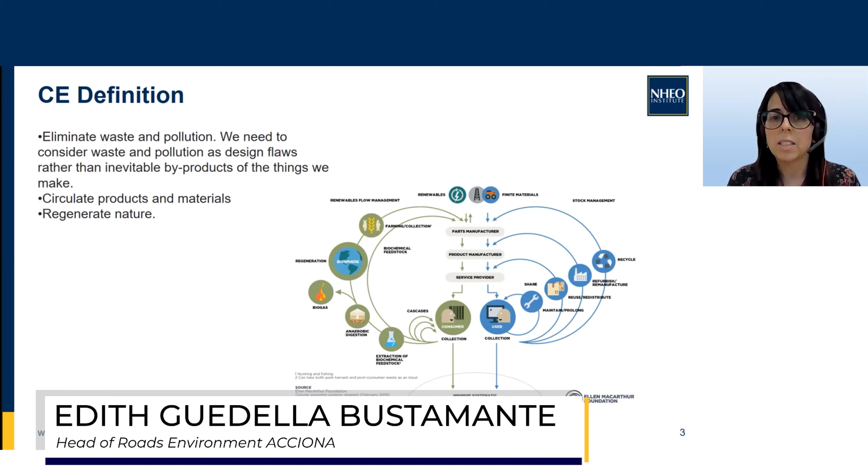All these principles are clearly stated in the butterfly diagram from the Ellen MacArthur Foundation, where this diagram is a feedback system divided into 2 systems, the mechanical cycle and the biological cycle.

Regarding the mechanical cycle, we start by the recycle of materials, which is the cycle where the product has the least value. Then we have the restore cycle of a product, the reuse of a product, and the maintenance of a product. Each of the cycles contributes to the system.

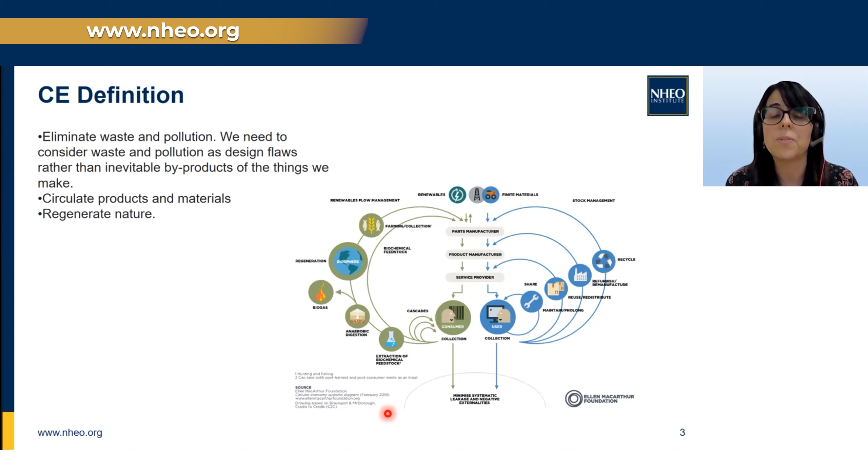Then we have the regeneration system associated with the biological cycle. The biological cycle is composed of biological materials that could return into the natural system, and that is why it's a regenerative cycle. Valorizing and appreciating flows of energy, materials, and information is the meaning of the feedback system that represents this diagram. Instead of losing these resources, they return positively into the system and rebuild and restore natural capital.

Once we have the vision of circular economy, we are going to relate circular economy with sustainability, with the SDGs contribution. The circular economy has a direct impact on 80% of the SDGs, with an extraordinary transformation capacity, work creation, and economic development. But we should be aware that circular economy needs to address the social aspects of the SDGs.

This is the reason why we need to focus on the gaps where circular economy is not very well known for addressing the current SDGs, for example, the ones of 1, 2, 5, or 10. And there is a requirement to enable circular economy transition, pushing the relationship with the SDGs 4, 16, and 17.

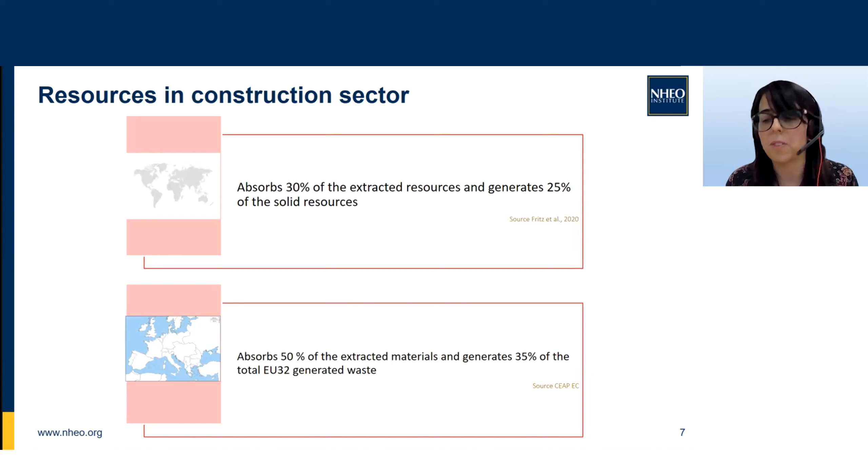Let me introduce the current building development cycle and how we produce from the design phase to manufacture, construction, use, demolition, and landfill. This is our current system.

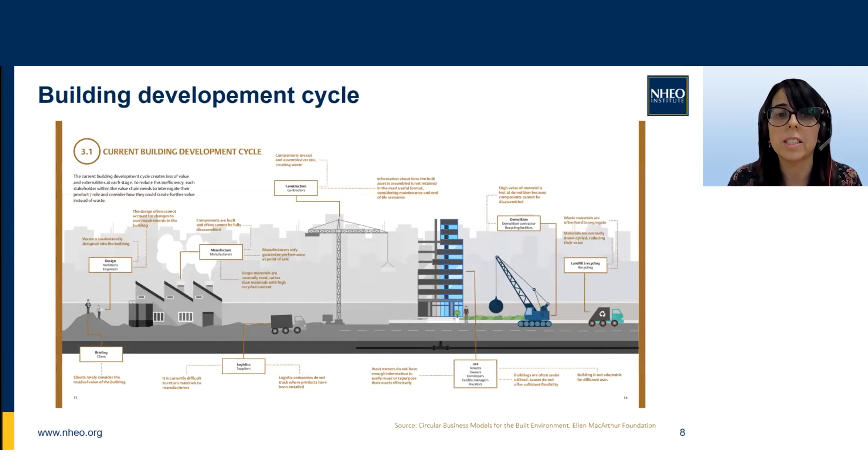And what we would like to do is transform this system. How can we do that?

We can apply different circular business models in the current value chain through approaches of circular design, circular use, or circular recovery in each of the stages previously mentioned: design, manufacture, construction, operation, and end of life.

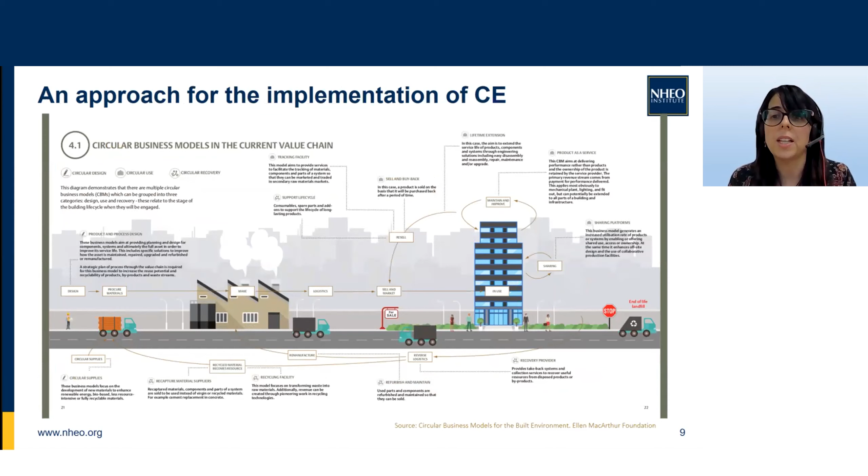And in the end of life, we need to create added value on that.

Now I would like to give you some examples of circular economy applications in the different life stages of construction, associated with this circular cycle, circular products, or regenerative design.

In this case, we start with an example in design and manufacture, applying eco-design principles.

I would like to show you the example built by ACCIONA of the first lighthouse made entirely of composite materials in the world, installed in the port of Valencia.

This lighthouse was designed following LCA practices for the selection of materials. It was designed taking into account durability.

It was designed in order to support the environmental conditions, as it is on the coast, and integrating renewable energy for the production of light.

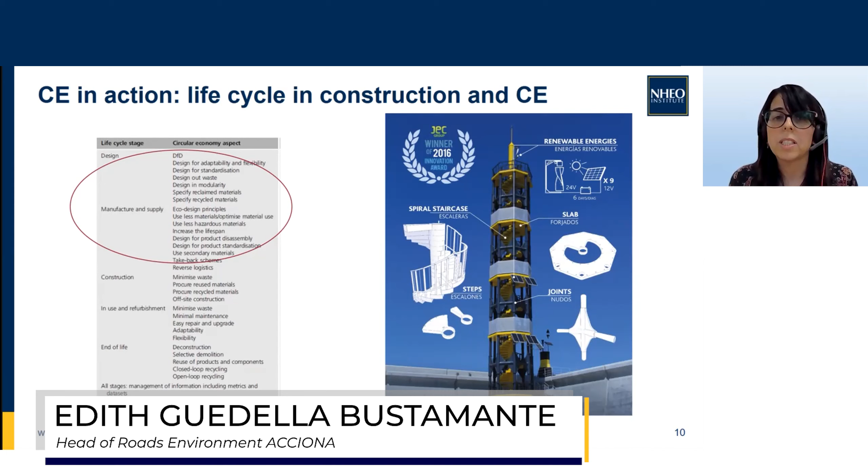It was designed to increase durability, for easy maintenance, and for disassembly, which you can see in the photograph showing the different parts of the lighthouse.

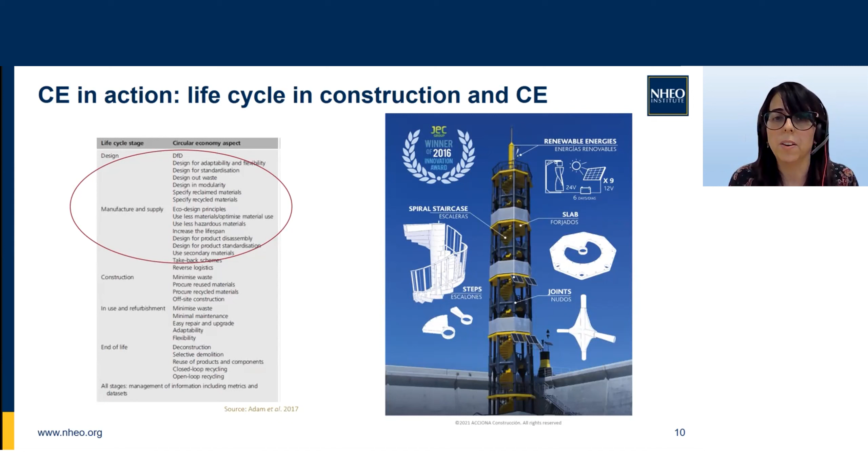Regarding the construction phase, as an example of circular economy models applied there, I would like to give an example of a project we built in Spain, in the southeast of Spain.

This is a highway where we substituted the cement used in the soil cement layer, in the basement of the pavement, with waste paper boiler ash. It was a 100% substitution of cement with this material.

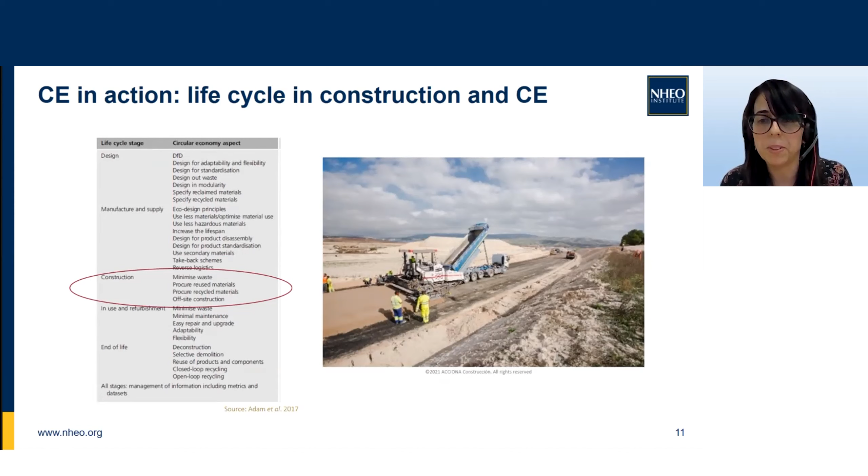This material was derived from industrial symbiosis strategies between the construction industry and the pulp and paper industry. Regarding in-use and refurbishment, I would like to show you the application of self-healing materials in road pavements.

These materials allow further durability of projects and reduce their maintenance. This was an application made in a highway in the south of Spain.

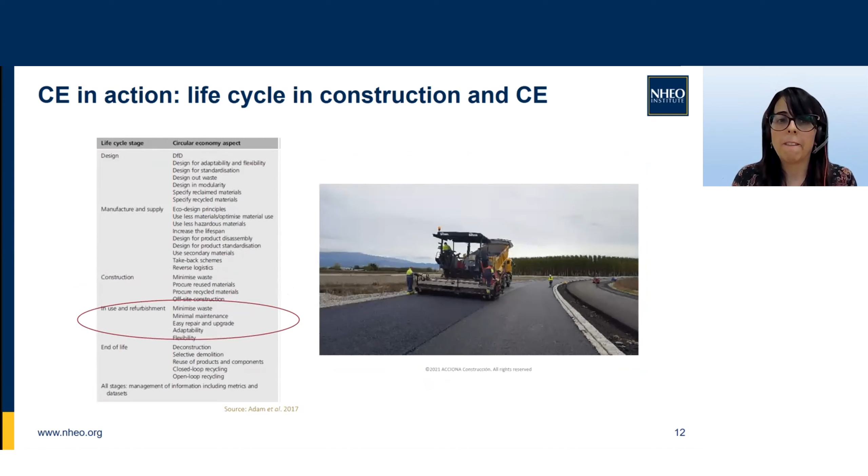Regarding end of life, we have to think about construction and demolition waste, which is our own waste, and its potential use on our own sites with a higher percentage of substitution of natural aggregates, or even its use in the same projects where there is a demolition.

You can use these aggregates directly on site. These are some examples made at Spanish sites with this material.

So this is an example of the regenerative cycle mentioned before, with the different approaches of the business models.

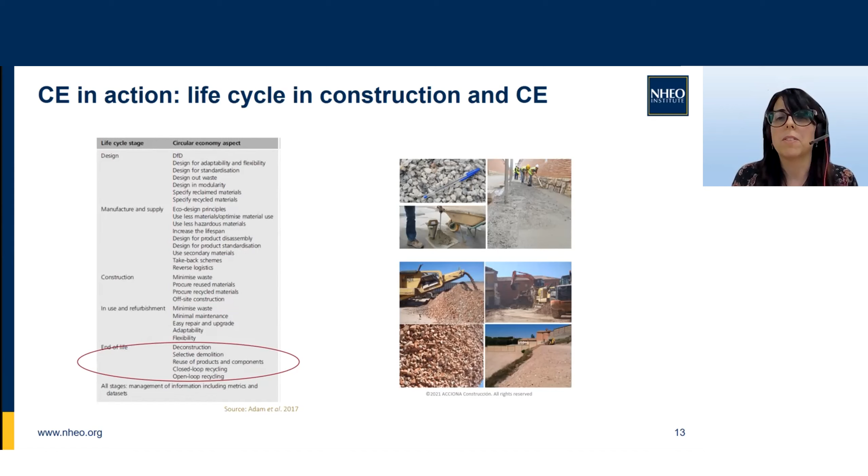I would like to finish with a conclusion on the introduction of circular economy in construction: to change the system and create value by promoting a regenerative system within the construction sector.

We see that it's possible. We know this can highly contribute both to climate change mitigation and to sustainability, and that it could change the way we do things in construction. So thank you very much.